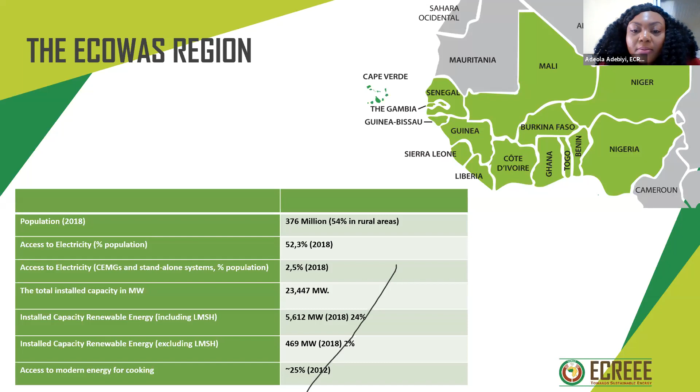Energy access is just about average across the region, but it varies by country. For example, Cape Verde has achieved energy access of about 90.3%, while in countries like Liberia and Niger, it's about 8.1% or 12.7%.

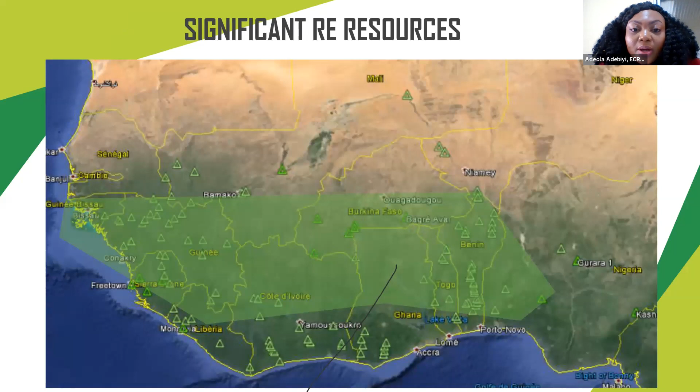However, there are significant renewable energy resources in the ECOWAS region. We have a significant amount of bioenergy resources, solar energy resources especially in the Sahel countries, and hydropower potential that is still untapped even with the significant hydro we have in installed capacity now. And of course, slight wind potential across the coastal areas in the region.

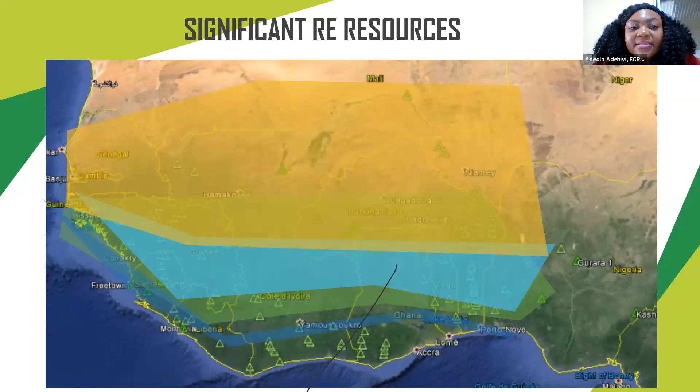I think all of these factors were the deciding factor for why ECREEE was established. One, the population; access to energy is still average for all these decades, and even with significant renewable energy resources, we are still not able to close the energy access gap. So ECREEE was established in 2008, but formally inaugurated in 2010.

So ECREEE has 5 result areas, and I think one important result area is to make sure that this institution itself...

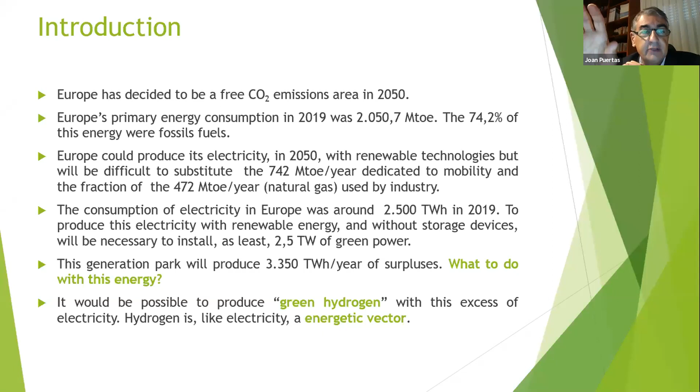To show the commitment of Europe with hydrogen, in 2018 the European Union published the roadmap of hydrogen for Europe. This roadmap pretends to install 40 gigawatts of hydrogen production by 2030. On the screen you can see an example.

In June, the Prime Minister of Germany, Mrs. Angela Merkel, announced a plan to invest 7,000 million euros to develop hydrogen in Germany. And 10 days ago, the Prime Ministers of Portugal and Spain announced another plan to invest 15,000 million euros in the Iberian Peninsula for the same objective.

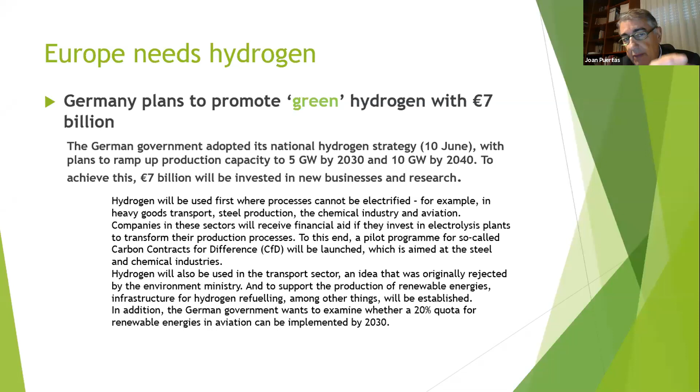What is hydrogen? Hydrogen is the most abundant chemical element in the universe, but unfortunately it's not possible to find it free in our planet. To obtain hydrogen now, it's necessary to split a molecule that contains it. The more common molecules are methane or water.

Hydrogen is the element with the highest calorific value by unit of mass, exactly 142 megajoules per kilogram. On the other hand, it's the lightest element. This is a problem because 1 liter of hydrogen has a weight of only 71 milligrams. Hydrogen has 3.5 times more energy by mass than petrol and natural gas - 1 kilogram of hydrogen has 3.5 times more energy than a kilogram of petrol or natural gas. Finally, hydrogen can be used mixed with CO2 to produce renewable synthetic fuels.

There are three ways to produce hydrogen, depending on the sources used. The most common now is gray hydrogen, produced by splitting the molecule of natural gas in a chemical process. This process produces a big quantity of CO2 - to produce 1 kilogram of hydrogen it's necessary, at minimum, to emit 5.5 kilograms of CO2, or 6 or 7 because the heating process also consumes natural gas. Gray hydrogen is a big emitter of CO2 to the atmosphere.

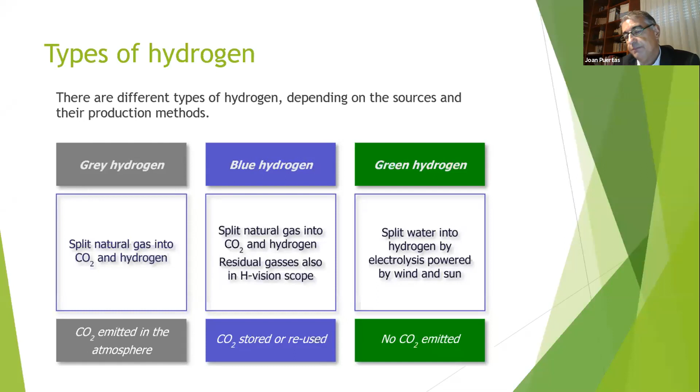To produce a kilogram of green hydrogen, it's necessary to use about 45 kilowatt-hours of electricity. As you remember, Europe will have an excess of energy of 3,350 terawatt-hours per year. If Europe uses this excess electricity to produce hydrogen, it could produce 74 million tons of hydrogen per year. But Europe wants to replace all these fossil fuels by 2050.

This is supposed to replace the 742 million tons of oil dedicated to mobility and half of the 472 million tons of natural gas used by industry. To substitute all these fossil fuels, Europe will need 300 million tons of hydrogen per year.

The question is, where can this hydrogen be produced? I will leave this question in the air, and I will answer it at the end of my presentation, okay?

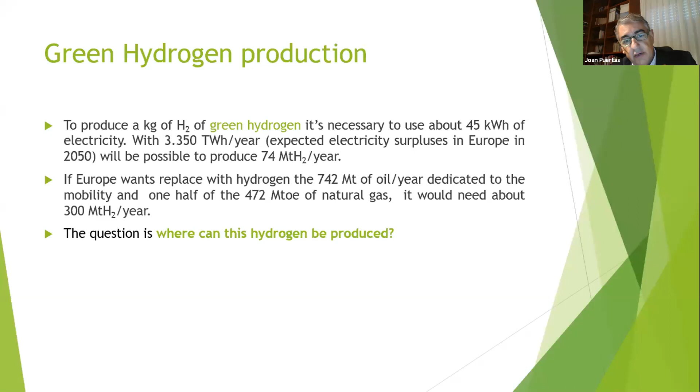But we will have energy in the form of hydrogen in a grid, a virtual grid, into which we can introduce blue hydrogen, produced by sequestrating the CO2. We can also obtain hydrogen from biomass or biomethane. The next speaker will explain how to obtain hydrogen by this method. Finally, we can produce energy in other countries and import this hydrogen. These are all the ways to introduce hydrogen, green hydrogen, or hydrogen without CO2 emissions, into our virtual network.

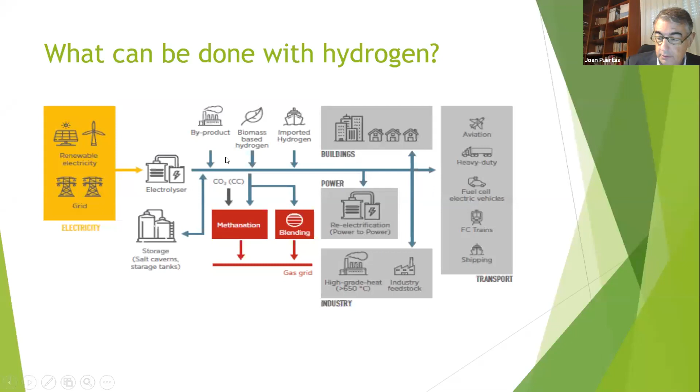Well, to produce green hydrogen, we need an electrolyzer. The electrolyzer is a very simple machine. We need a source of electricity; if we move this electricity from the cathode to the anode, it crosses the water and splits the water molecule into hydrogen and oxygen. As we said before, we need 45 kilowatt-hours to produce 1 kilogram of hydrogen, and the efficiency of this machine is 85%.

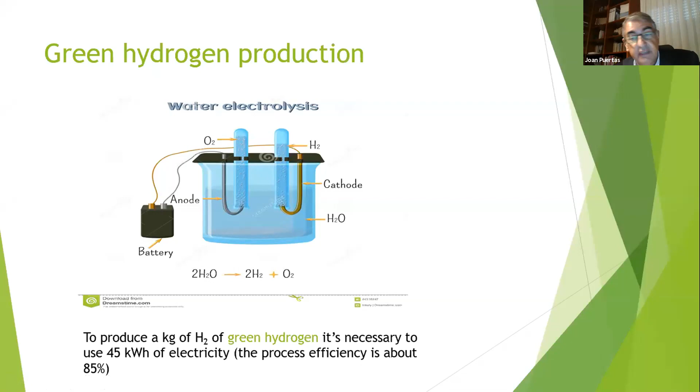The fuel cell is the opposite of the electrolyzer machine. It is the center of the economy of hydrogen. The economy of hydrogen needs the fuel cell to recover or transform this hydrogen into other sources of energy.

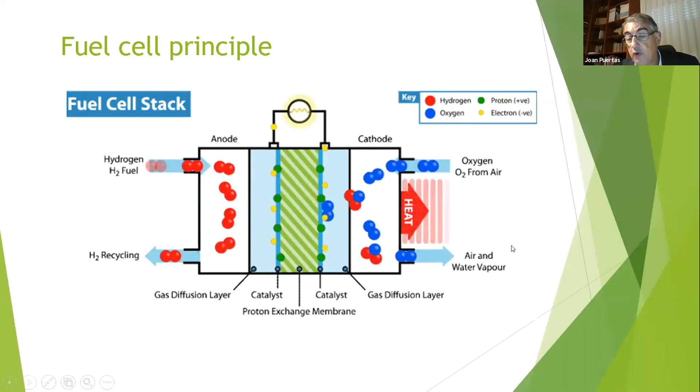In the fuel cell, we start with hydrogen at the anode. This hydrogen splits into an electron that moves through the electrical circuit, and the proton crosses the electrolyte to the cathode. In the cathode, the proton joins with the electron and with a molecule of oxygen that arrives, producing vapor of water. You introduce hydrogen, you produce electricity, and you obtain vapor of water. There is also heat in the process. It's an exothermic process.

There are 5 types of fuel cells. We can group them into 2 types: fuel cells of low temperature and fuel cells of high temperature. The more common fuel cell is the membrane fuel cell, shown to the left of the screen. This fuel cell works at 100 centigrade of temperature, and the electrolyte is a synthetic membrane. It has a very low efficiency, only 40%. In this group, we also have alkaline fuel cells.

The alkaline fuel cells use potassium hydroxide as electrolyte and work at 150 to 100 centigrade. Finally, in this group, there is the phosphoric acid fuel cell, where the electrolyte is phosphoric acid, as the name says, and it works at 250 centigrade.

These fuel cells are used in mobility and for supplying buildings normally, and small industries.

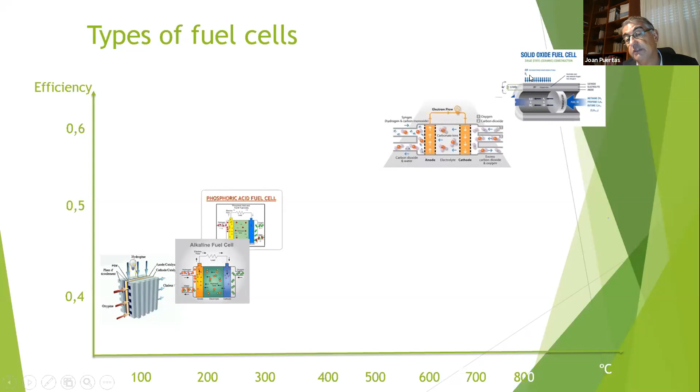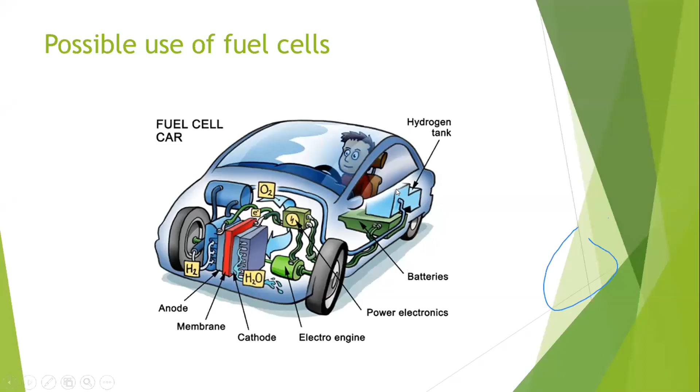Possible uses of fuel cells: you can put a fuel cell, for example, in a car. In this case, we have substituted the traditional engine of a car for a fuel cell. We have a hydrogen tank, and we can supply hydrogen to the anode of the fuel cell, a membrane fuel cell in this case, and we can put oxygen in the cathode of the fuel cell.

This fuel cell will produce electricity, then supply an electric engine. The electric engine moves the car. We need an additional battery because the production range of electricity from the fuel cell is very narrow. In some cases, the engine will need more electricity than the fuel cell produces, and the battery will supply this additional energy. In other cases, production will be higher than the demand of the engine, and this energy will be stored in the battery. But the size of the battery will be very small - it's only a regulator.

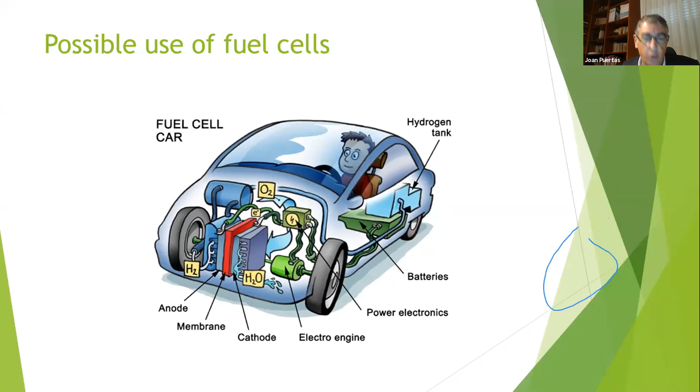The other 40%: 25% was emitted in the production of electricity with fossil fuels, coal, and natural gas, and this 25% will be eliminated in the future with renewable energy. The other 15% is produced in agriculture and livestock, and this will probably remain in the future.

But for this 60%, hydrogen has solutions. There are solutions for the 60% of CO2 emissions, changing the actual fossil fuel by hydrogen. Here you have a list of all these solutions by sector.

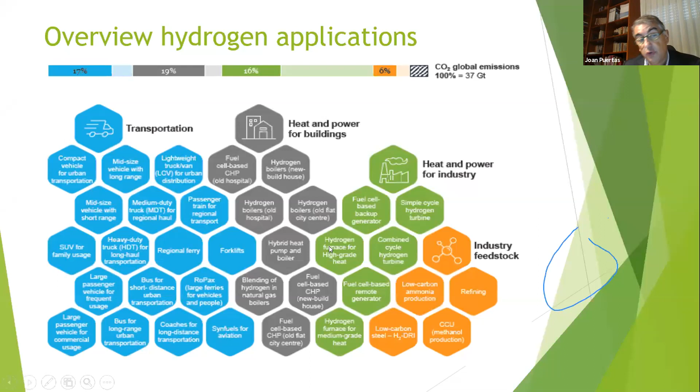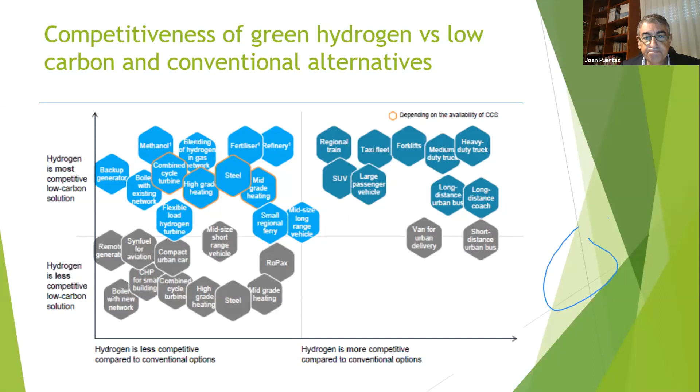Well, we will speak about the cost of green hydrogen. For now, to produce 1 kilogram of green hydrogen costs about $5-6 per kilogram, and we need the same price to put this hydrogen in the place to use it. So we have a final price of $13 to $16 per kilogram. The situation is changing quickly because with the reduction of the price of electricity, the cost of hydrogen will be, in the next 2-3 years, between $1 to $3 per kilogram. And the price to move it will put the price for the end user between $3 to $7 per kilogram.

As you remember, 1 kilogram of hydrogen has 3.5 times more energy than 1 kilogram of petrol. And the price of petrol now in Europe, without taxes, is approximately 1.2 euros. 1.2 euros multiplied by 3.5 is 4.2 euros. With a price between $3 to $4 per kilogram, hydrogen will be competitive in relation to petrol.

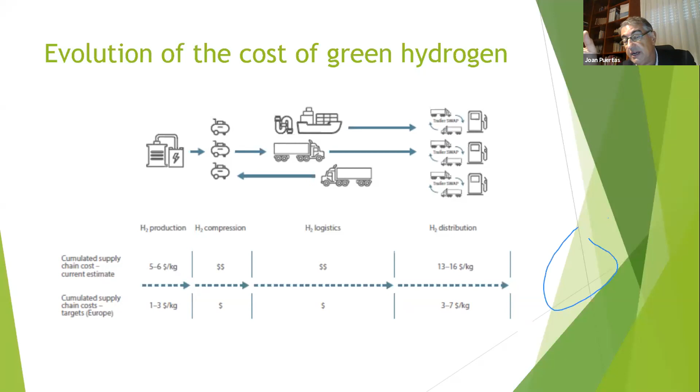Now, you have all the solutions that we explained in the 2 slides before, put here, and there are the forecasts of when these technologies with hydrogen will be competitive. For example, for production of ammonia, methanol, and refining in industry, green hydrogen is competitive now because it's cheaper than gray hydrogen plus the cost of emission rights.

And for use in regional trains, for example, in 2-3 years, by 2025, it will be competitive, or for heavy-duty trucks or medium-duty vans, for these applications. And by 2050, all the solutions with hydrogen, except one—the use of small cars in urban regions—will be possible. Hydrogen will be competitive in all these solutions by 2050, being the best and most competitive solution. We can say that hydrogen will be the solution to emissions in the next 30 years.

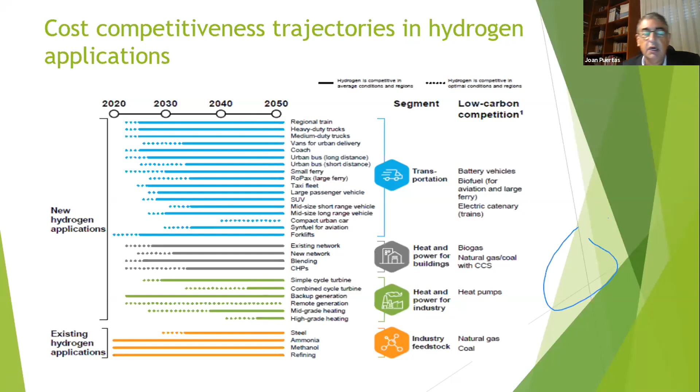Well, here are quickly some examples of real solutions with hydrogen. This is a train produced by Alstom, a French producer of trains, that is moving through a region of Germany, Lower Saxony exactly, solving the connection problem between the cities of Lower Saxony. There are 14 units of fuel cell trains moving through this area.

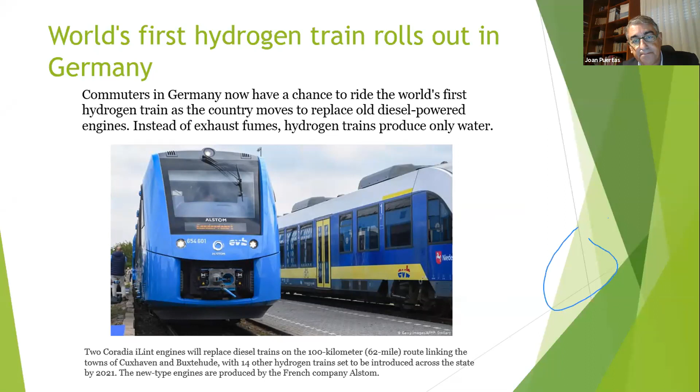Mercedes and Toyota have also announced their fuel cell truck products recently. This is a chart made by Toyota, Hyundai, and Daimler Mercedes, explaining the future of mobility. This chart says that if you need to move less than 5 tons in a range of less than 100 kilometers, the solution for mobility will be small cars and urban mobility.

Probably you will cover this range with battery solutions. If you need to move in a distance between 100 kilometers and 5,000 kilometers, and you need to move loads between 5 tons and 5,000 tons with trucks, buses, or trains, the solution will be fuel cell. And finally, if you need more distance and more weight by boat or by plane, you will probably need synthetic fuels produced by hydrogen. This is the forecast of mobility from these 3 companies.

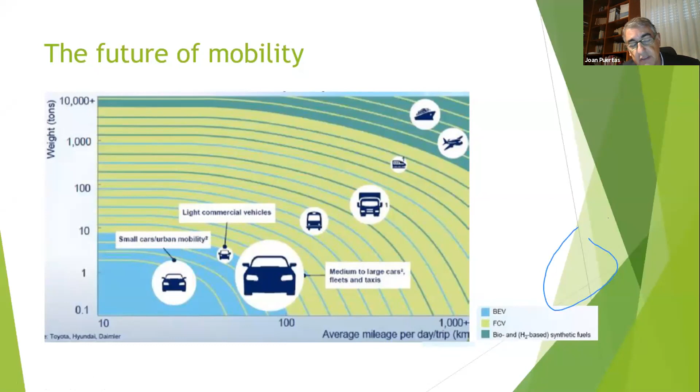Well, finally, we are finishing. Just to say what the geography of energy is and will be in the near future. In the beginning of this century, the main consumer of energy was the United States, with 2,200 million tons of oil equivalent, and the second was the European Union. China and Africa were third and fourth.

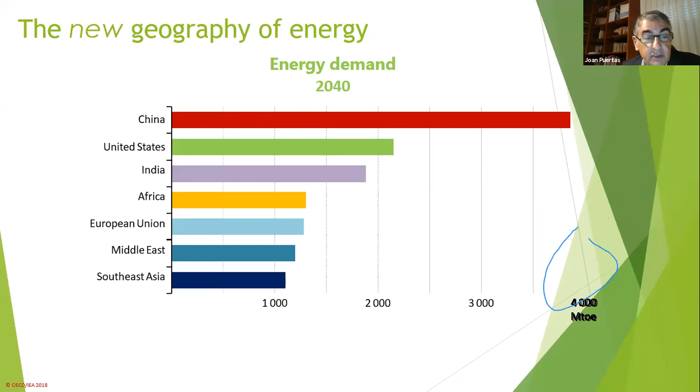The forecast of the International Energy Agency is that in 2040, the main producer and consumer of energy will be China, with 3,800 million tons of oil equivalent. The second will remain United States, with the same consumption as now. The fourth will be Africa, and the fifth, the European Union.

In 2040, Africa will produce and demand more energy than the European Union. Africa will be a real potential in 2040. The role of Africa in the energy world in 2040 will be predominant.

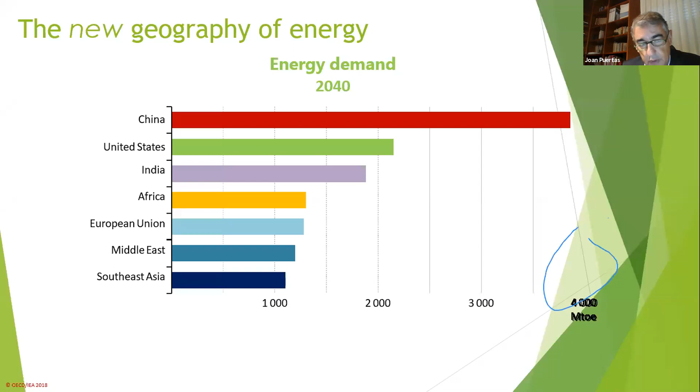The evolution of energy consumption will be different in advanced and developing economies. Advanced economies will increase their demand only with renewables. Developing countries will install renewables in big quantities, but also nuclear and natural gas. Natural gas will be used in developing countries as a very important transition energy in the next 20 years, unlike advanced economies that won't use more gas than now.

Oil will continue to be used with increasing demand in developing economies, but not in advanced economies, which will reduce consumption in big quantities because of solutions like hydrogen and electrical mobility. Finally, coal will disappear totally in advanced economies, and will continue being used in some developing economies, because producing electricity with coal will probably continue being the cheapest option for some countries.

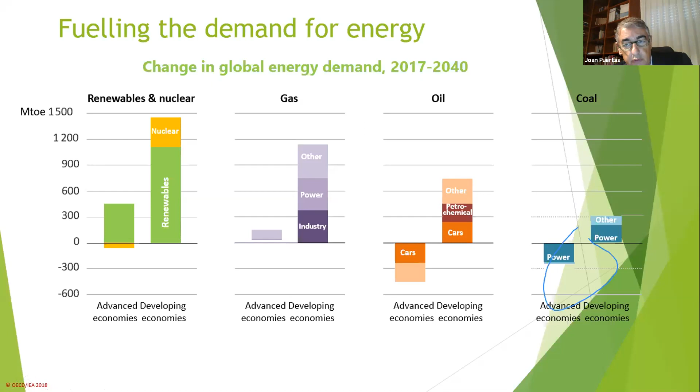To finish, I think Africa has the best conditions to install green power. Our colleagues explained in the introduction about the potential of the ECOWAS area to install green power, because the insolation ratio is optimal, and the situation in the world is optimal.

One year ago, I had the possibility to attend in Australia the first stone act of the Murchison Renewable Hydrogen Project. This project is the first in the world that built a park of 5 gigawatts of renewables dedicated only to production of hydrogen. Murchison is in the west of Australia, north of Perth. It is a very desertic area.

At this event was the prime minister of Australia, Scott Morrison, and the CEO of Siemens for this area. The CEO of Siemens said: 'Australia has potential like no other country in the world for hydrogen production and export. I imagine exporting West Australian sunshine and wind to the world in the form of hydrogen.' I think Africa has, at minimum, the same potential as Australia, and I imagine in the future Africa producing for itself and supplying hydrogen to Europe.

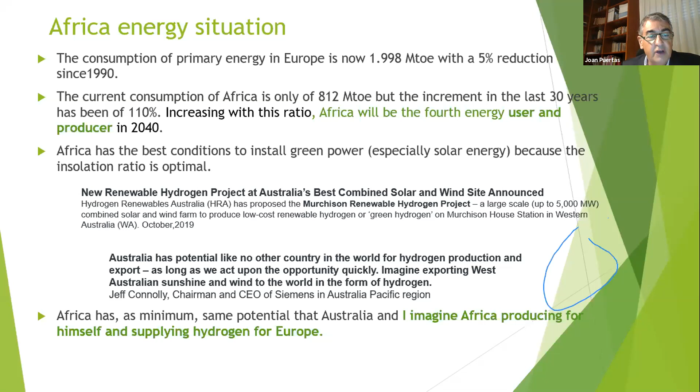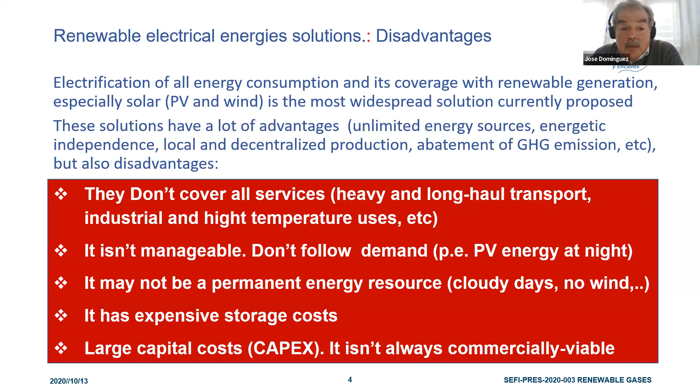And then with that, how can we solve this problem? Using available energy sources, not only electrical, and with 3 conditions. Have an energy mix without discrimination between resources.

We have photovoltaic and wind systems, well, but we have another solution: legal security. All solutions need investment, very important. And people, if we have not legal security, they won't invest.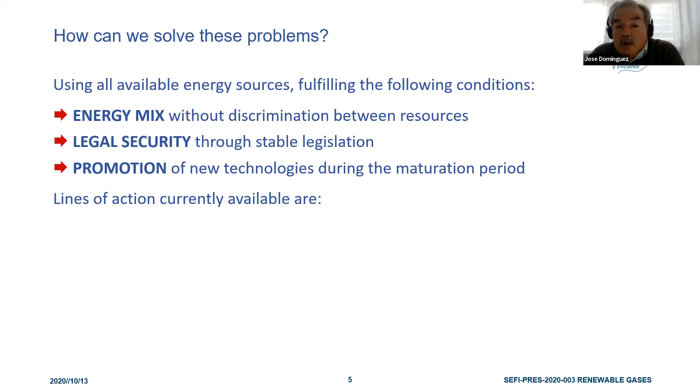And finally, with the promotion of new technologies during the maturation period, not subvention, only promotion, maybe feed-in tariff. There are a lot of systems, but all that with legal security.

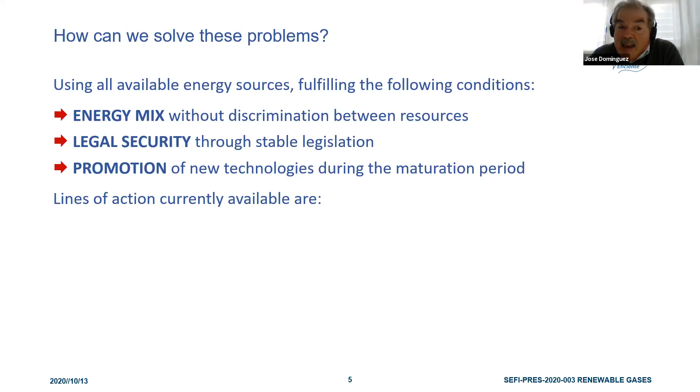And the lines of action we have in this moment: maybe biofuels, which are carbon neutral fuels, electrical backup for the renewable production - in this case we have the combined cycle system, in this moment with natural gas - and the short, medium, and long-term storage.

This storage in this moment is only possible into the gas network, because batteries are limited and very, very expensive. People say in the future we will have affordable batteries. Well, when we have affordable batteries, we will use them.

And finally, one line of action is optimization of CapEx of new investment. When we need less capital, the renewable investment grows.

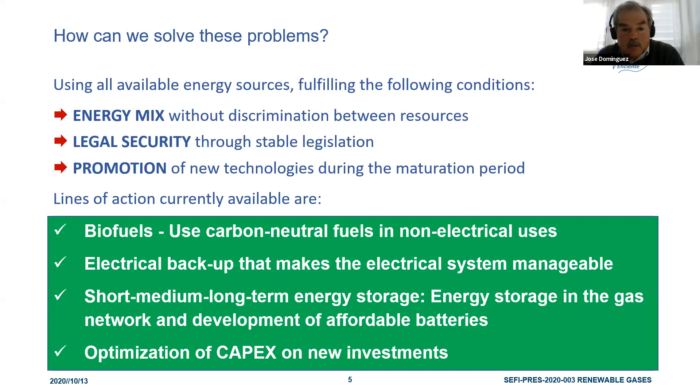And then one of the lines of action: the biofuels. Biofuels are a substitute for fossil fuels with organic origin that don't produce net CO2 emissions. Sample sources, some very well known, like crops with Jatropha or Camelina.

Trees of short rotation like timber, willow, and wastes like oil, wastes of kitchen, food, or agriculture.

But we have two new feedstocks like algae. In this moment there is a water treatment plant in the south of Spain. In this plant, they use algae to extract the nitrogen and phosphorus from the sewage, the wastewater of the city of Cadiz, and obtain pure treated water.

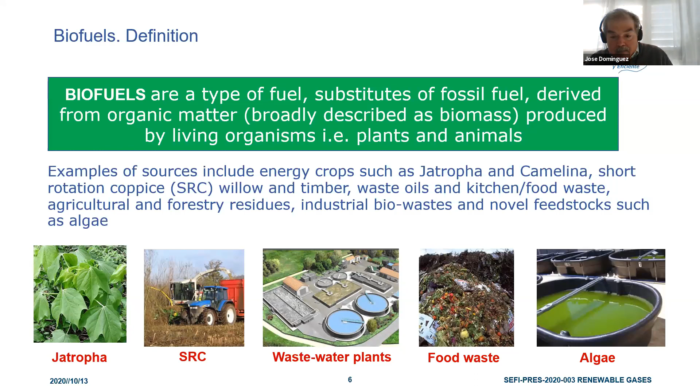And we obtain algae to produce biogas in a cycle of AD, anaerobic digestion.

And finally, in the definition of biofuels, there are two types. The first generation, where the first biofuel used had a problem: when we have an energy crop on a site, we could instead have a food crop, and then there are problems.

Energy versus food. But in the second generation of biofuels, there is not this problem, because we use waste plant material, or intermediate crops. We have it on the same soil: we have a food crop and continuous energy crops.

In all this, in this second generation, we have different types of biofuels. Since the bioethanol, widespread in Brazil, used in transport cars with ethanol, and now with gasoline.

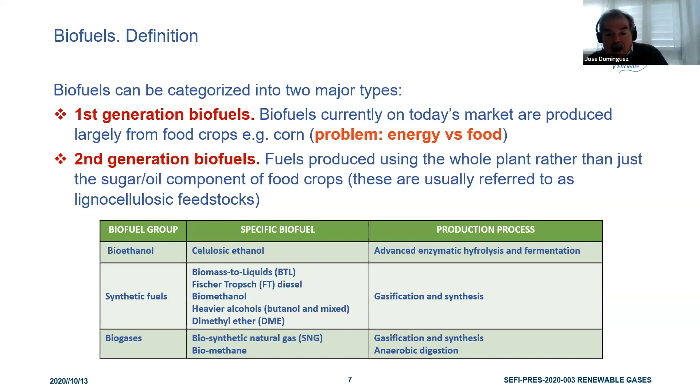And we have a third way: the biogases. Maybe synthetic natural gas, or bio-synthetic natural gas, produced from wood usually, or biomethane and biogas. And these last fuels are produced in anaerobic digestion.

Well, about the renewable gases, the renewable gases are obtained from renewable sources. But the question is, are they neutral or even negative in CO2 emissions?

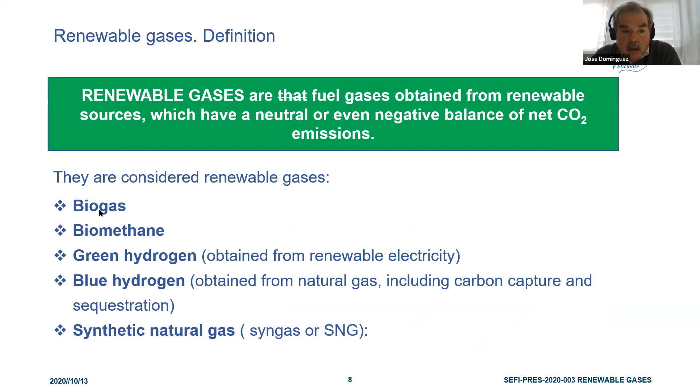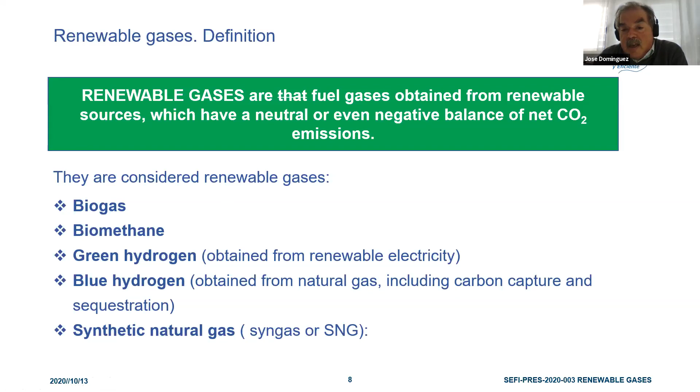What are the advantages of renewable gases?

They cover demand that electricity technologies don't cover: road transport, high temperature applications in industry, thermal demands in buildings, covered with mature technologies that we use in this moment. They also use local resources, and since the resource is local, it generates local employment.

Basically through the intermediate of energy crops, and generate byproducts like organic fertilizers. In anaerobic digestion, we have digestate, an organic fertilizer equal or better than chemical fertilizer.

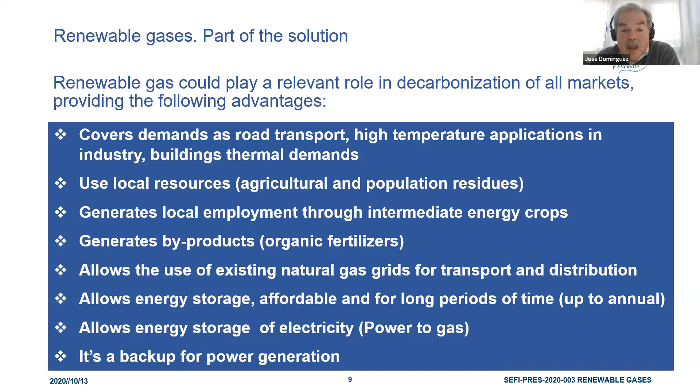We can produce hydrogen with electricity that is not demanded. This hydrogen mixed with CO2 can produce methane, synthetic methane, and in this case, this is the solution as a backup for power generation.

This is about storage. Batteries are a solution for hours or days. Other solutions for storing energy may be compression of air, or pump stations in hydro systems. But to obtain storage on the order of a month or two years, we need storage in the gas grid, in the underground storage of this grid.

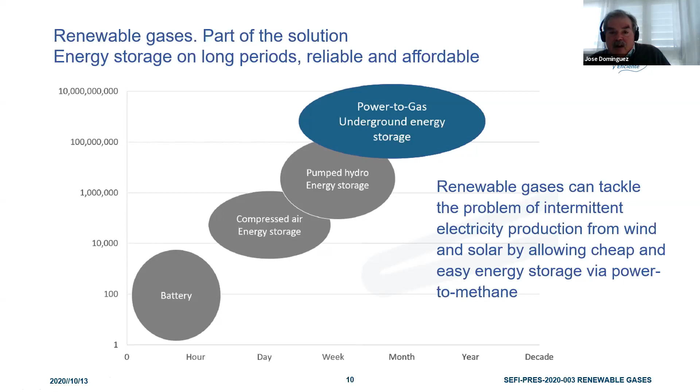And this is the pathway with the technology of renewable gases, in this case, biomethane. We have different sources of energy.

Sources may be sewage, agricultural or livestock waste, crops. In an installation of anaerobic digestion, we obtain biogas, or through upgrading, biomethane, and we obtain digestate, an important fertilizer too, and we displace the chemical substitute, the chemical fertilizer. The biogas is for local use and utilization.

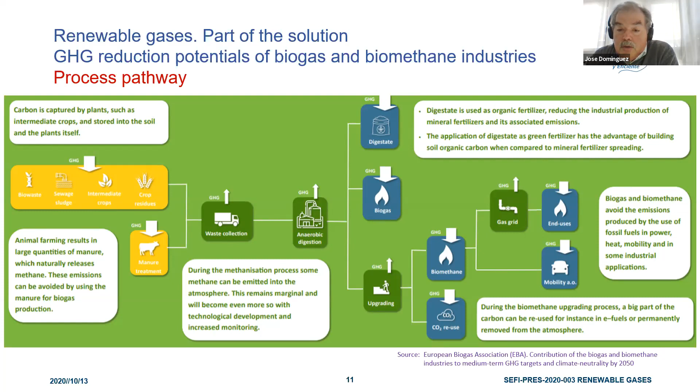And with biomethane, the important issue is that we can transport this energy long distances to use it for thermal or non-thermal uses, for mobility, or for heating buildings, or using it in industry.

And finally, renewable gases or renewable electricity. The smart solution is to use both, and then we obtain a sustainable system.

Only renewable solar energy, wind or photovoltaics, have a great problem: 1 megawatt electrical can produce 1,500 megawatt-hours per year, or in the best case, 2,000 or 2,200 megawatt-hours.

For example, a combined cycle of natural gas, 1 megawatt produces 4,000 or 4,500 megawatt-hours per year, or nuclear, one nuclear plant, 1 megawatt produces 8,000 megawatt-hours, and we can manage this production, because in both cases, combined cycle and nuclear plants, the production is regular all day, 24 hours per day.

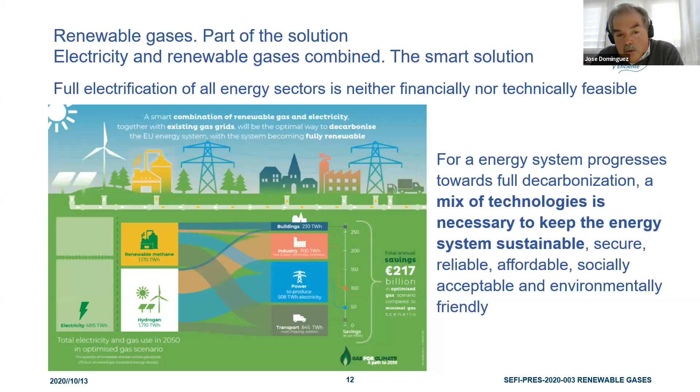Or if we don't need it, we can shut down this installation. But if we have solar and wind power, if we have excess production, we can obtain hydrogen or biomethane, store that in the gas grid, and when we need more electricity, we use this stored energy through fuel cells or combined cycle. This makes a circular energy system, and we use our wastes too.

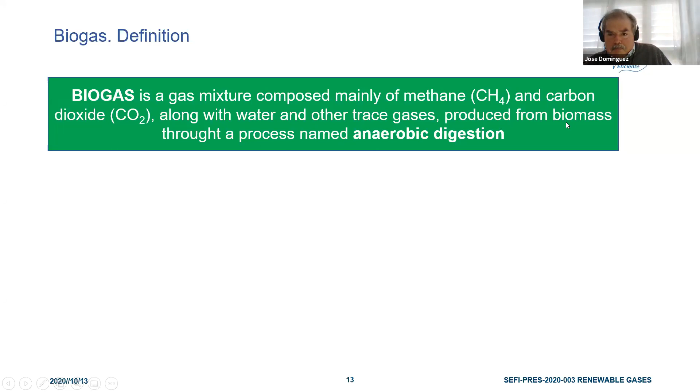Now centering on talking about biogas. Biogas is a mixture of methane and mainly carbon dioxide, with other products like water, sulfide, or traces of dust. It's produced from biomass, and the process to produce it is anaerobic digestion.

In this process, anaerobic digestion uses fermentation, where the organic matter breaks down to obtain this production.

Its typical composition is 50 to 75 or 85% methane, mainly the rest is CO2, and we have maybe hydrogen or hydrogen sulfide. This is a product to extract, it's dangerous, and it's corrosive.

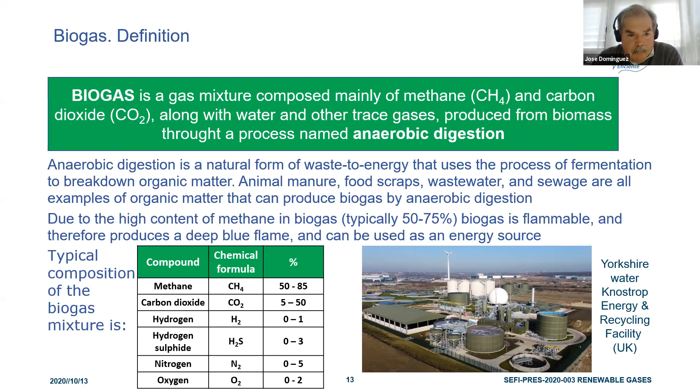The source of the biogas usually comes from landfills. In landfills, gas is produced by the decay of organic matter. If we don't use that, the methane produced in this decay goes to the atmosphere, which is a loss of energy, and this methane released into the atmosphere is another greenhouse gas. So we can seal this landfill and use a pipe to extract this methane.

This methane has a great percentage of nitrogen, the N2, maybe 5% more or less, but it's another biogas to use. And in the landfill, if we have a selective separation, we can use the product of the landfill to obtain anaerobic digestion too.

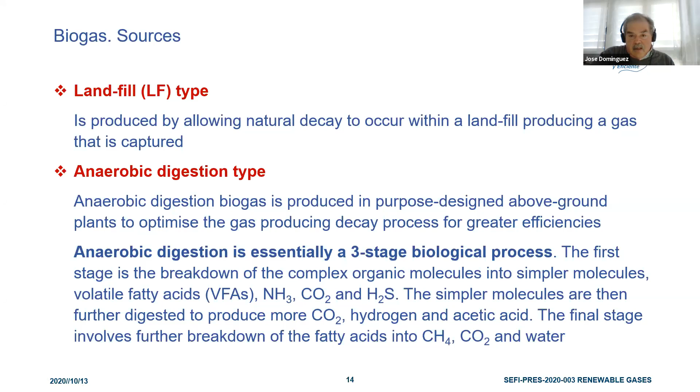We also have anaerobic digestion. This digestion is a process of decay in which the organic molecules are broken down to finally obtain CH4 methane and a lot of CO2. This is the origin of the presence of CO2 in the biogas.

We have two typical cycles to obtain biogas from wastewater or from livestock and agricultural origin. In both cases, we have a raw material. The raw material is introduced into the anaerobic digester, and then we obtain biogas or biomethane.

We can obtain electricity, and we have a digestate, a fertilizer used to grow new crops, or in this case, use this biogas. This digestate is used to obtain fertilizers.

But the core of this process, the anaerobic digestion - what are the steps of this process? First, the feedstock preparation: selection of sources, and grinding. This is needed to get a little piece of that, to obtain a bigger contact surface.

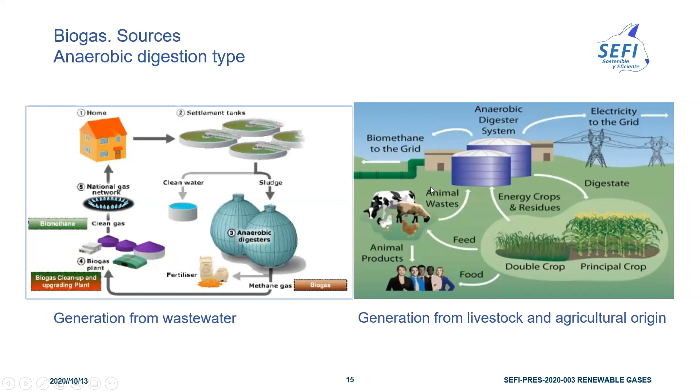We need the biggest contact surface possible - we need the best contact possible.

Then we inject this feedstock into the tanks, the digester, the tanks of digestion. This injection is done with sludge pumps into the tank. This sludge, this feedstock, stays there for 2 or 3 weeks, and during this time, the sludge is moving through agitators.

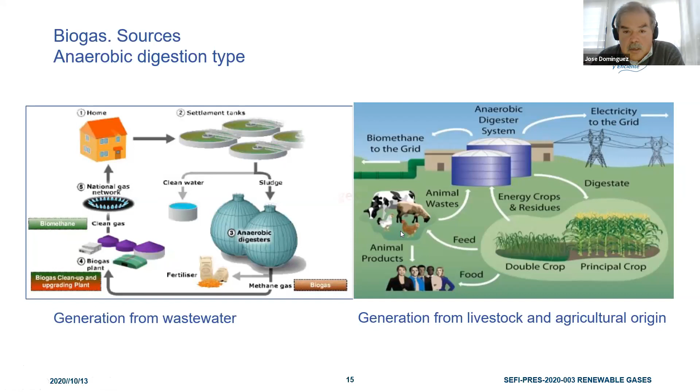Here we have different conditions for this process. The digestion may be mesophilic at 25, 45 degrees centigrade, or thermophilic at a higher temperature. In this case, we need a heat exchanger to heat the sludge, the product.

We may have a digester for wet feed, which is typical, with 5 or 15% dry matter, or dry feed. The wet feed has better production than the dry feed, but the investment with wet feed is lower than with dry.

And the mode of operation may be continuous or batch process. The usual is the batch process. And single or multi-stage digesters are used to obtain regular production.

The process takes 2-3 weeks for producing, and we need a few days or 1 week to extract the final digestate, clean the tank, and inject new feedstock. Then to produce regularly, we typically need 2 or 3 tanks to obtain the digestion.

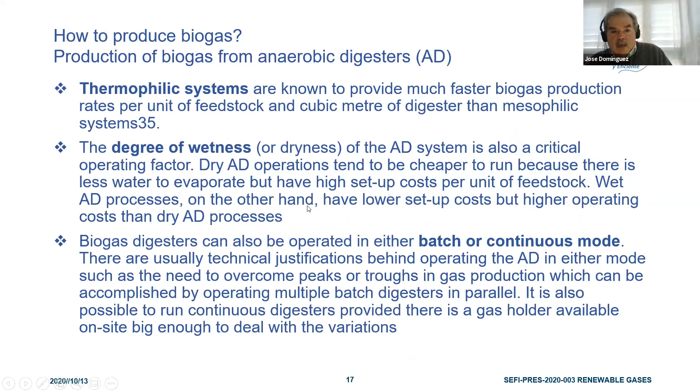That's explained in this slide. Why is biogas interesting? It's a local energy source using waste - population waste, agricultural, or industrial waste - to obtain energy. This energy can be used in the form of electricity with cogeneration, a combined heat and power unit.

The electricity is used by people and for internal use of the plant, and the heat is normally used in the same process. We also have a byproduct, the digestate, that can be applied as an organic fertilizer, substituting chemical fertilizer.

With this production, we obtain abatement of CO2 and methane emissions that we would otherwise emit if we did not produce the biogas.

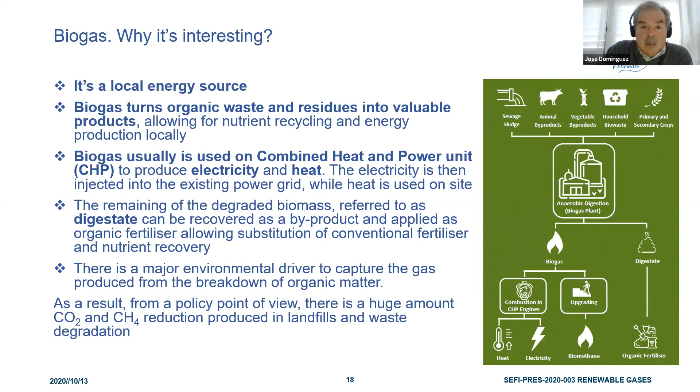And we have a second step. The biogas has low power, about 6 kilowatt-hours or 5 kilowatt-hours per cubic meter, normal cubic meter, but from this biogas we can obtain biomethane with characteristics similar to natural gas.

We can obtain biomethane by synthesization of wood or lignocellulose biomass.

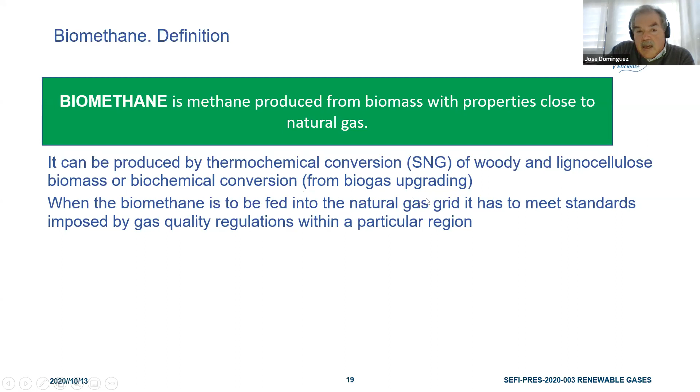An important question: the biomethane may be fed into the natural gas grid, but it needs to complete the standard. For example, in Spain, to feed biomethane into the natural gas grid, the composition must meet at least this minimum - the minimum percentage of methane must be 90.

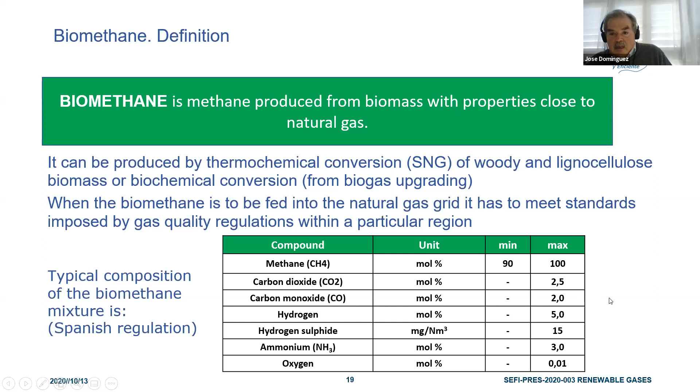In a lot of installations, the concentration of methane is 98, 97, so there's no problem. But we must meet this composition requirement.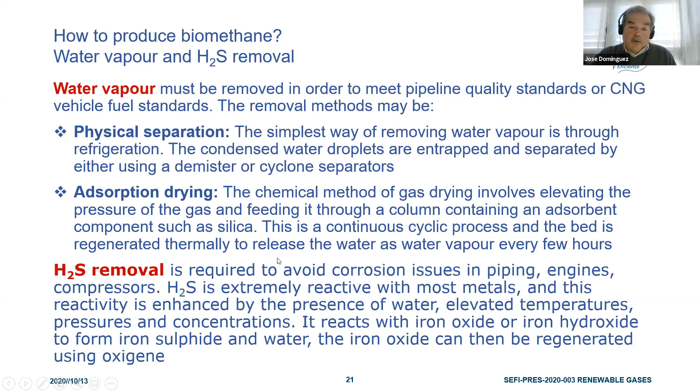Very quickly, we need to extract the water vapor and hydrogen sulfide from the biogas. We need to remove this because water causes problems with pipelines and engines, and hydrogen sulfide produces corrosion. There are processes to extract it.

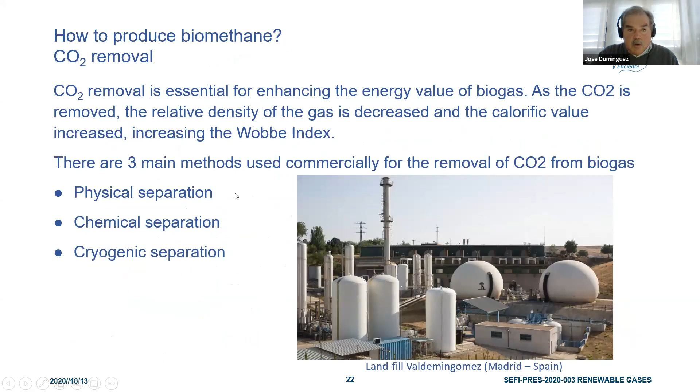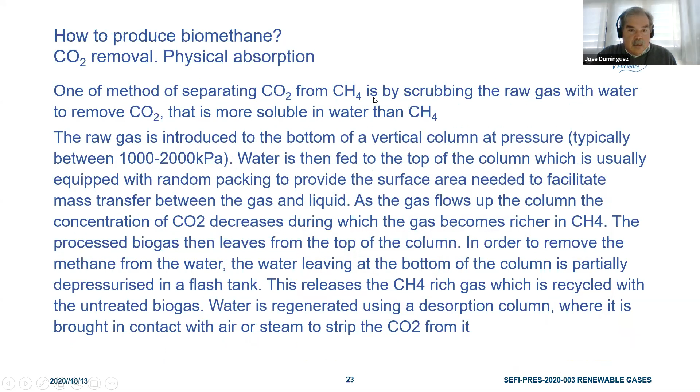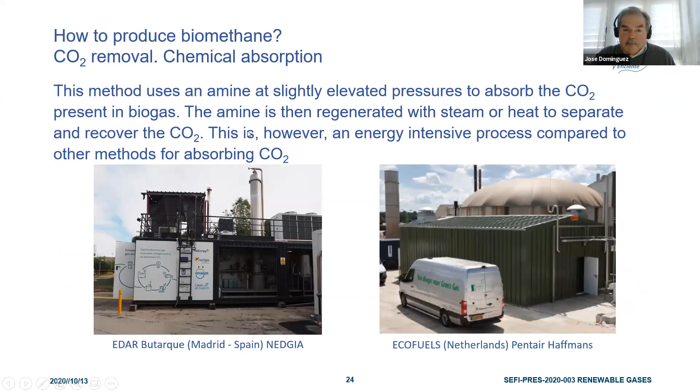To extract the CO2 and obtain biomethane, we have 3 methods: CO2 removal by a scrubber with water, chemical absorption with amines where the process is regenerated, or cryogenic separation, in which the gas is refrigerated and frozen to minus 78 degrees, the CO2 becomes liquid, and we can extract it.

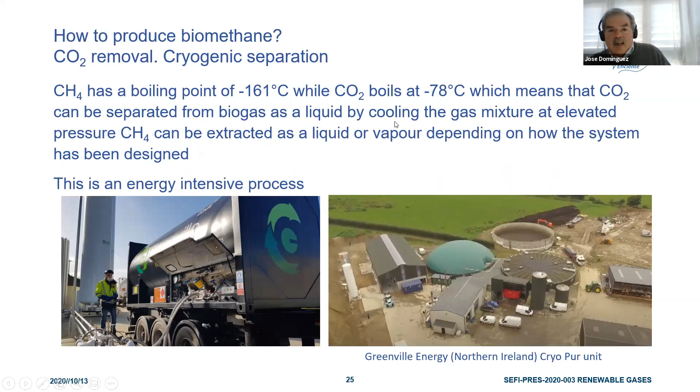We obtain pure methane, and biomethane is interesting if used like natural gas - to provide heat, electricity, or as car or vehicle fuel. But the most interesting use of biomethane is being injected into the gas grid, because of storage and use over long distances.

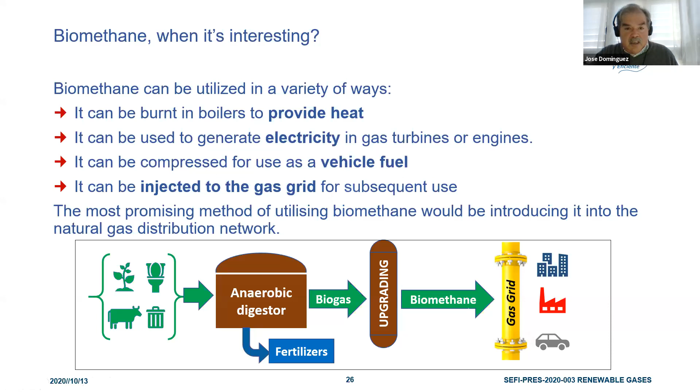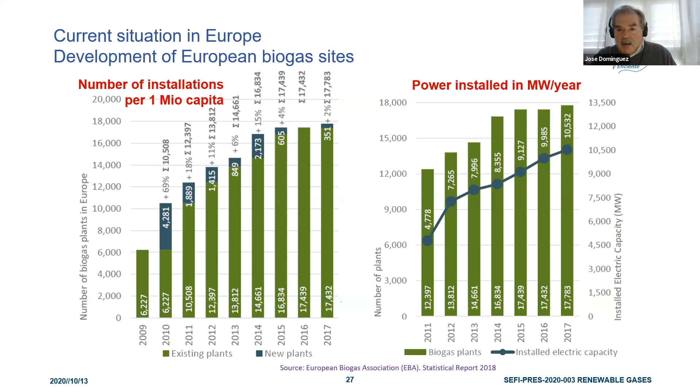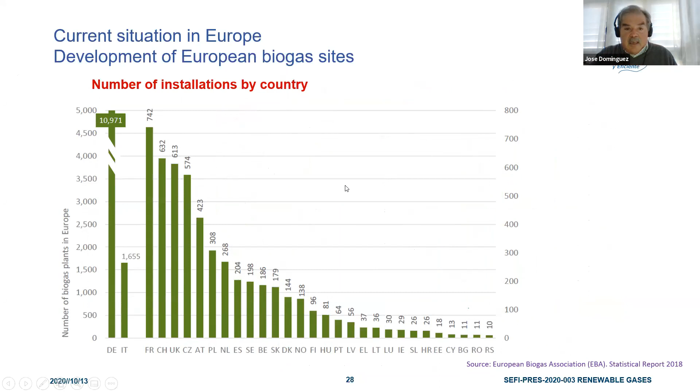The country with the most biogas installations is Germany, but it is growing in the United Kingdom in recent years, along with France and Italy. The feedstock most used in Europe is agricultural waste and agricultural crops.

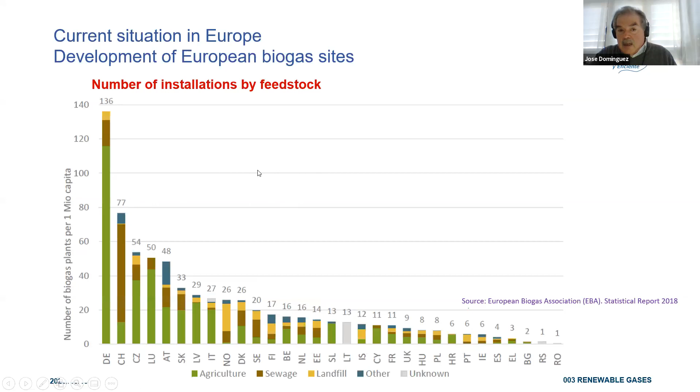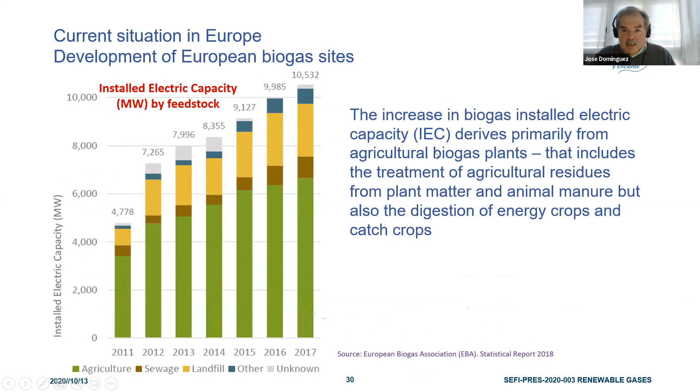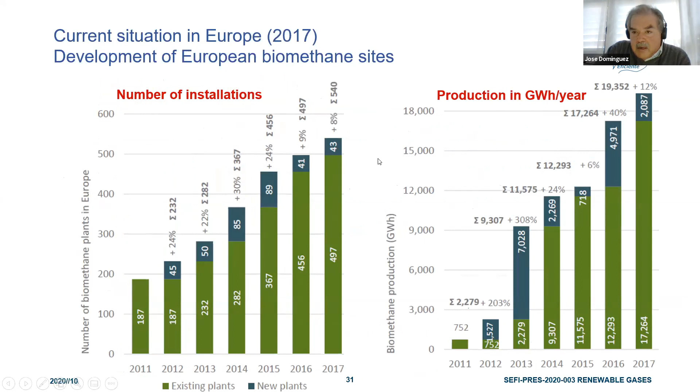Well, this is the question: the best increase is with agricultural biogas plants. With biomethane there are fewer installations - at this moment 540 installations, but that number is growing.

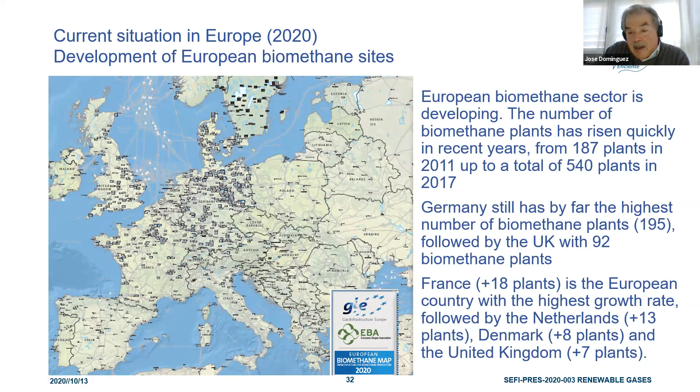Finally, as a conclusion, to achieve growth objectives and decarbonization, these two fields - biogas and biomethane - are necessary because they are healthy, allow management and recycling of our waste, are efficient, and allow better energy system management and security with less investment, and are sustainable.

We obtain this resource from waste, but like electrical renewable energy, it is necessary but not enough. For a sustainable future we need all sources in the energy mix. And no more - thank you so much for your attention.